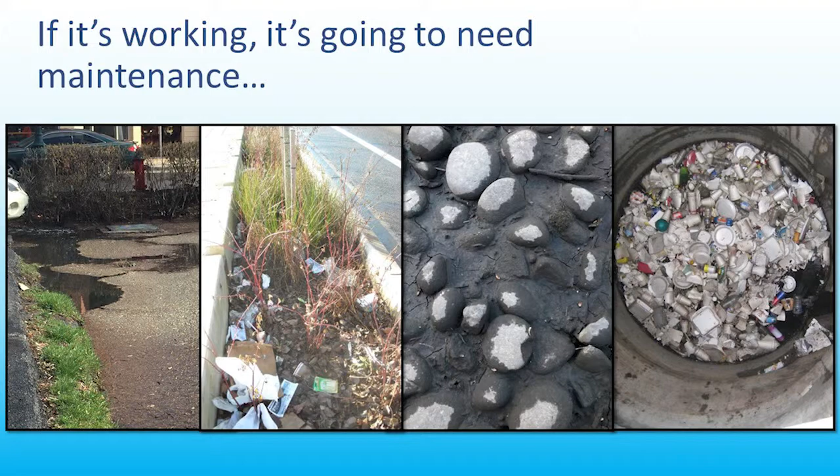These stormwater control measures that we design, approve, and install throughout our landscape - we don't do this as a one-shot deal just to check a box off the permit requirement. We really do expect these things to continue performing as designed throughout the entire life of the project. That means if they're working and removing pollution from the water they're treating, and if they're going to continue performing their flow control functions, they will need periodic maintenance.

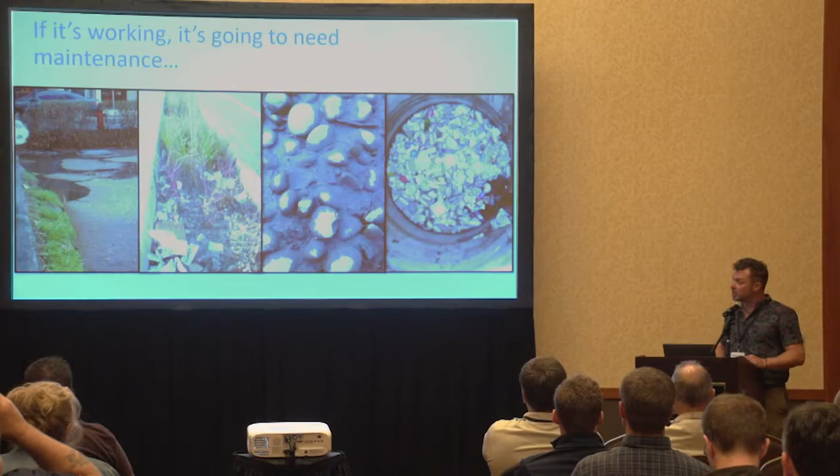Maintenance in this case can be determined up front in the design stage. So when I look at longevity relative to some of the other design variables we commonly use, two that come up often are performance and the hydraulic loading rate. These three play off each other in that standard three-legged stool analogy, where if you mess with a couple of them and try to increase those, you will be sacrificing on that third.

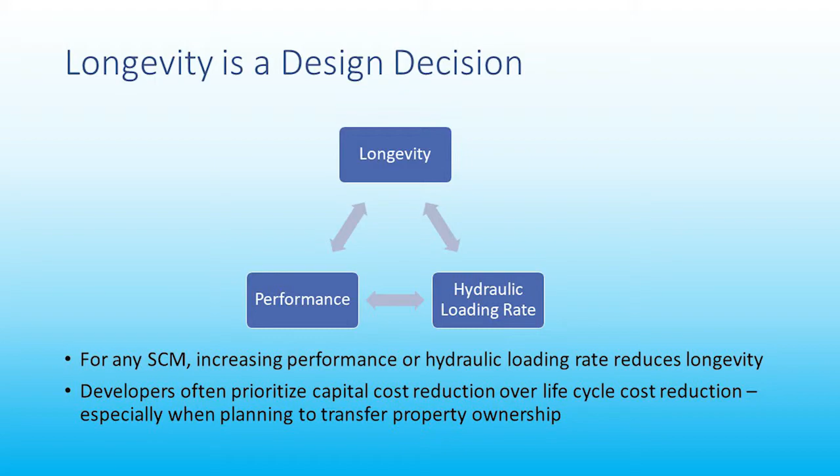Typically, performance is standardized - that's in your permit requirements or your manual requirements. From a developer's perspective, oftentimes the initial capital cost savings of increasing the hydraulic loading rate outweigh the long-term implications of the O&M over the life cycle of the project. That's particularly true when a developer is going to sell that development on. So in this case, we're trying to optimize performance and hydraulic loading rate so the system's as small as possible, and longevity will therefore be impacted.

I think this is generally accepted, but not necessarily delved into all the time. So it's sort of the elephant in the room on the three-legged stool, if you'll forgive the circus analogy.

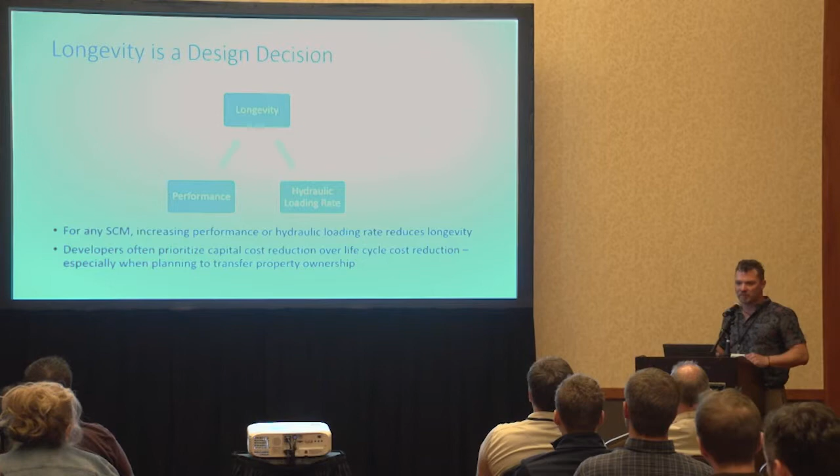So first, I want to look at a couple sample installations. As a designer, we look at these things, and also as a plan reviewer. There's some obvious things that can jump out for us in terms of whether or not these systems can be maintained.

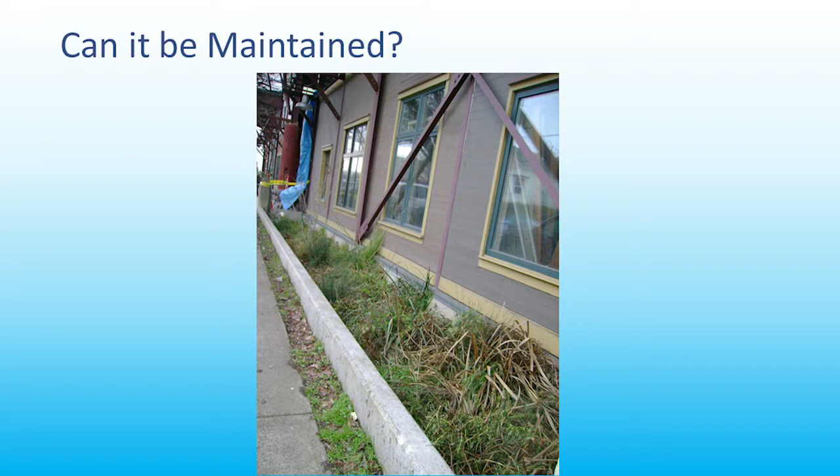Here we've got a pretty standard Portland planter box. This is in Northwest Portland. And is it maintainable? Absolutely. You can get to it from the sidewalk. They haven't done much with the plants here in a little while, but you can certainly inspect it, you can certainly access it. Maintenance, as far as this design is concerned, is quite possible and pretty easy.

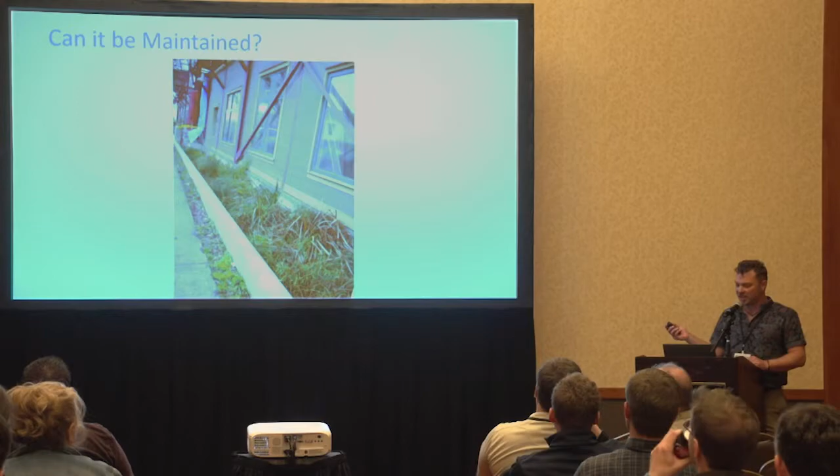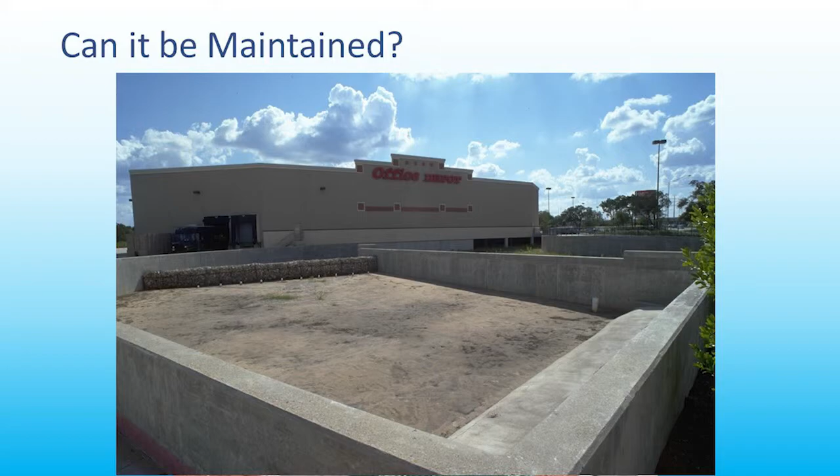Some things are a little more nuanced. This is a sand filter, an Austin sand filter in Texas. It's very large, treats a very large site, and I'd reckon it's designed correctly. But the problem here is the maintenance access. You can maintain it, but there's no vehicle access, there's no way to get irrigation close to it, some of the other common tasks that would be needed to properly maintain this. So someone will have to get in there by hand, and even given labor rates in Texas, this is likely to be a pretty high O&M burden over the life cycle of this stormwater control measure.

We talk about maintainability. There are those aspects that we can control with the design, but a lot of it also comes off the site. It's very site-specific, and this is really what determines how often we have to maintain these things.

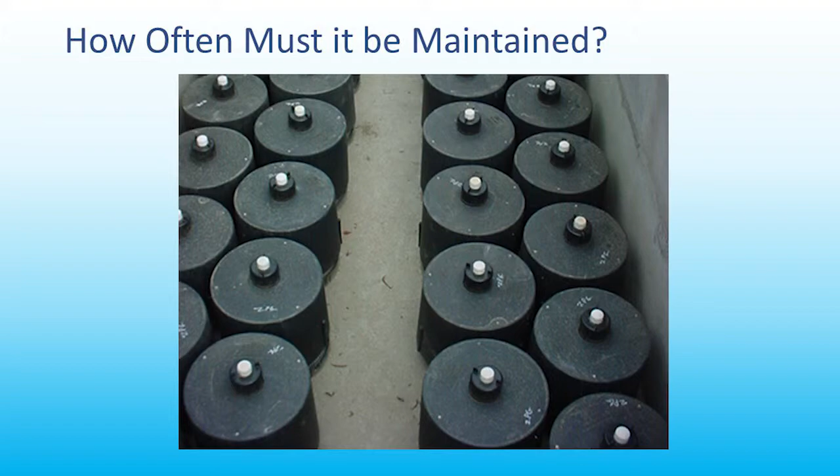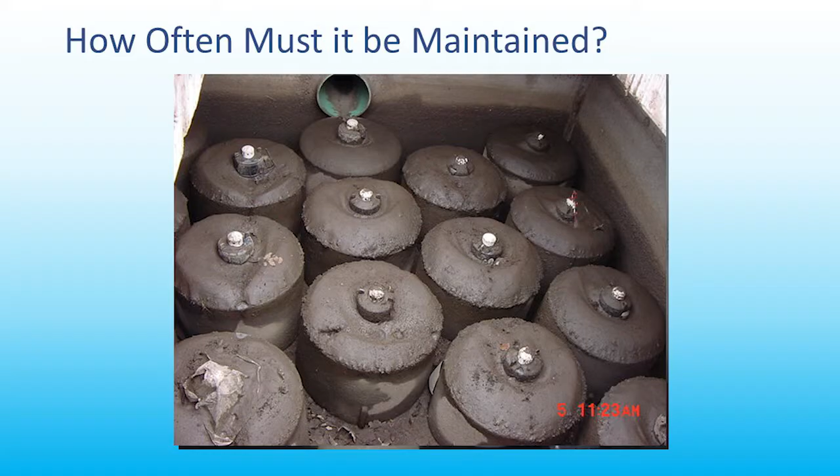So this is a storm filter. It's a cartridge-based media filter housed in an underground vault, and this one's brand new. You could eat off of it if you were so inclined. Over time, though, depending on the site pollutant loading rates and the amount of sediment coming into it, you won't really know by the time it turns into this without an ample and frequent inspection program going on. You're going to hear me say inspection a lot of times throughout this presentation. So for lack of inspection, you could end up going to this, although that's pretty ridiculous.

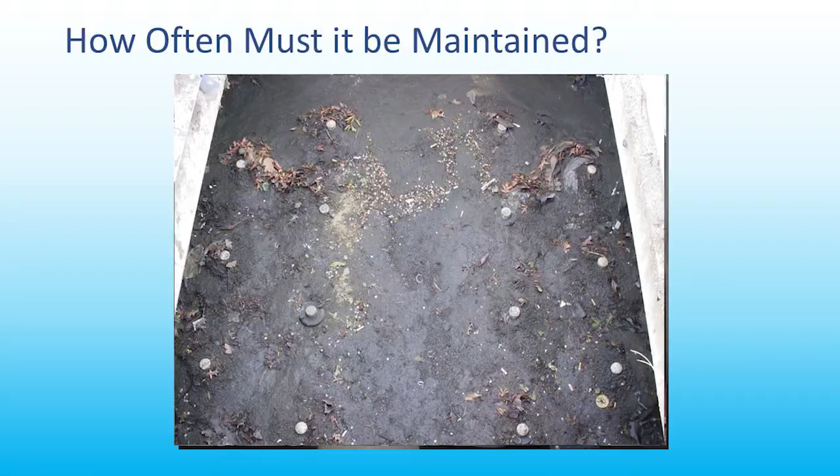To be fair, we do think this was caused by construction sediment that wasn't properly maintained, but it illustrates the point pretty well. Some things, again, are a little more nuanced.

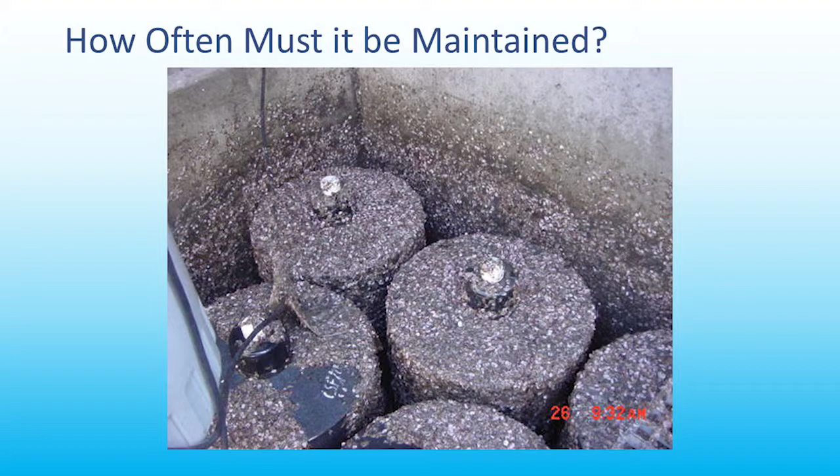Sometimes maintenance frequency should be determined by a different seasonal phenomenon. This is a system that we had in Olympia that we were testing for water quality, and when we opened it in mid to late spring, the entire site is just covered with these beautiful, vibrant pink blossoms from these cherry trees. So when we opened up the vault, everything's bright pink, it was sort of surreal. Do you guys remember those little Hostess snack cakes covered in the snowball things? That's what it looked like. The whole thing was just full of it.

So that's not a lot of sediment, that's not a lot of load, right? We weren't so much worried about the load of this stuff occluding it, but we noticed in the ensuing weeks, what you might expect, there was a lot of export of soluble nutrients from here as the stuff broke down and was carried out. So if downstream I had a nutrient-sensitive receiving body, I'd be pretty careful about maintaining this thing at seasonal events, also in the fall, when the leaves are falling. Just some things to think about that are site-dependent.

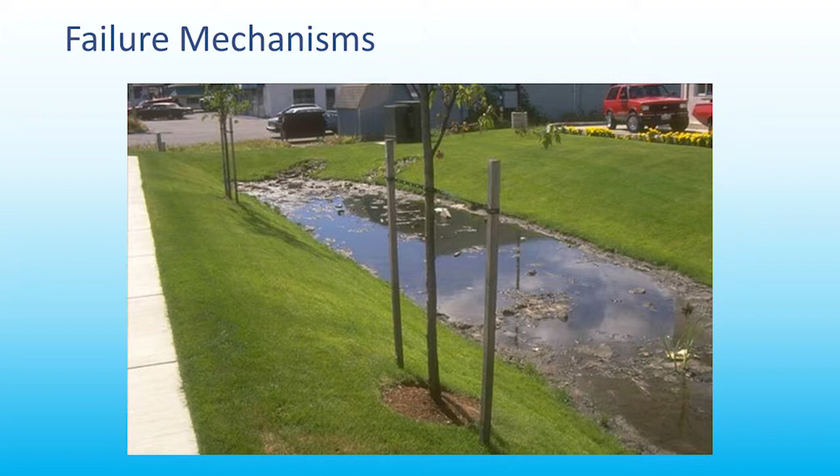Failure mechanisms with these systems can also be pretty obvious, like this one right here. This is a grass swale next to an undisclosed fast food place. Whether or not somebody decided to dump the fryer grease into here one night, I don't know, but it's obviously not working, right? Pretty clear failure mechanism.

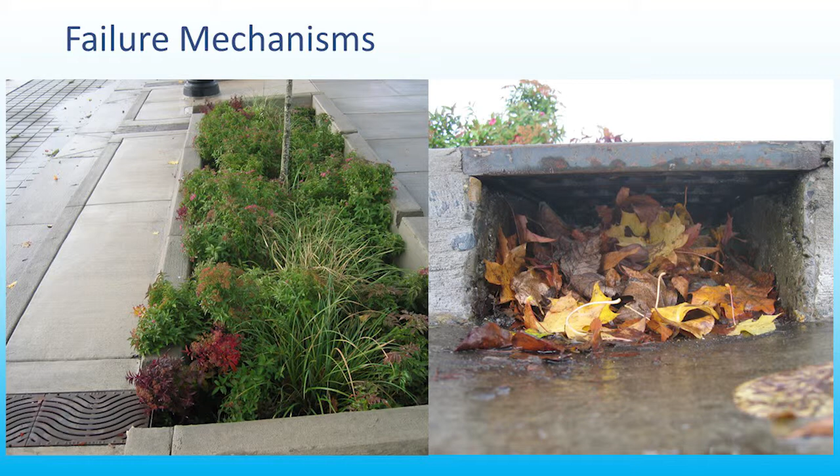But you'll notice that the only inlets and outlets from the street are these little trench inlets, and they're covered. You get down there and check it out, the thing's completely occluded with leaves. So if I'm an inspector just coming by taking a look at this thing, I'd say this thing looks great, but it's not receiving any flow.

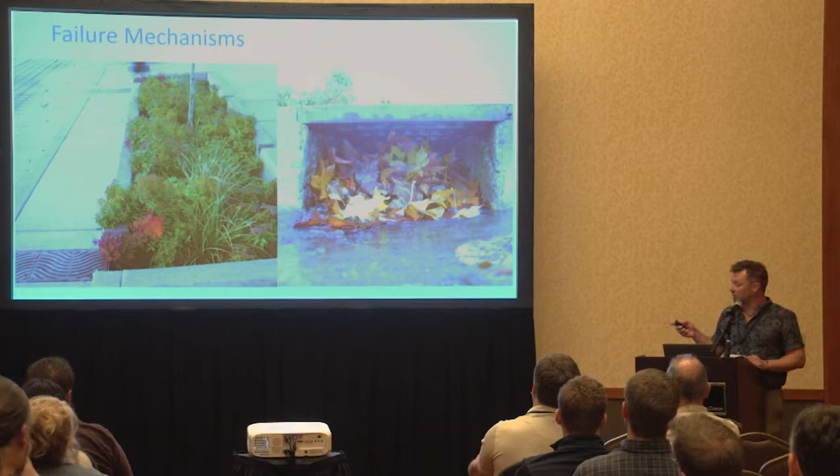No. So stormwater program resources are all very limited. How can we put in programmatic approaches that maximize the resources we do have to ensure that we get the longest longevity out of our systems, and we're continuing to meet our water quality and flow control requirements with the systems that we installed?

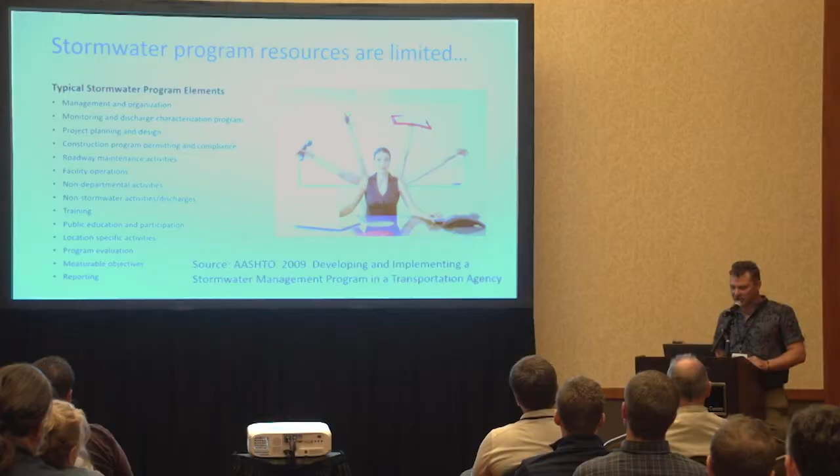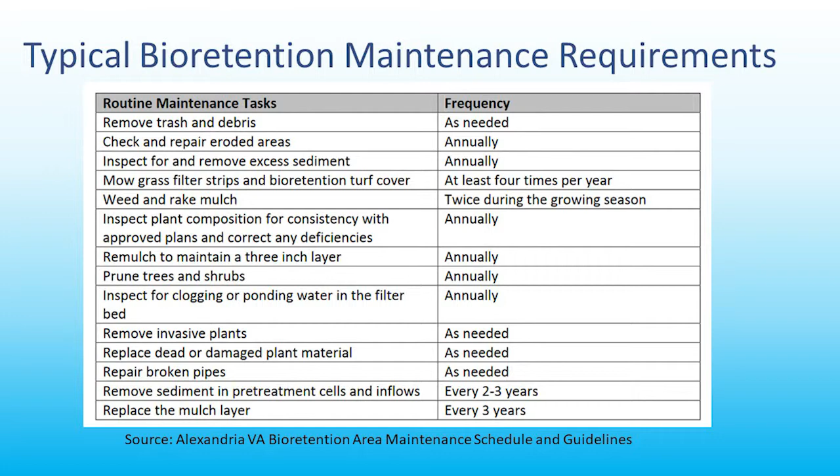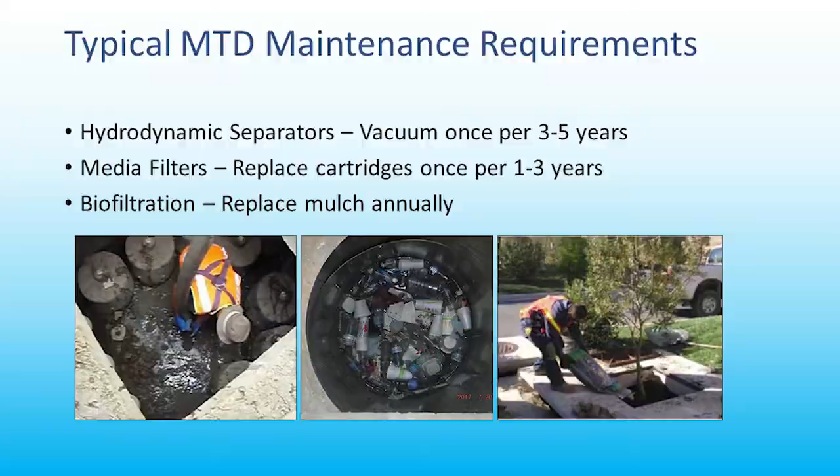Even in manufactured treatment devices that are out there, we have these things developed typically to last a little bit longer, but they do concentrate a lot of pollutants in a small environment. So when we have to maintain these things, there's quite a bit to do. It depends on what the system was designed for. You'll probably need a vactor truck. They're underground, so you'll probably need somebody with confined space certification. Because of the design of these and the site-specific requirements, it's hard to get a feel on this without a lot of inspection.

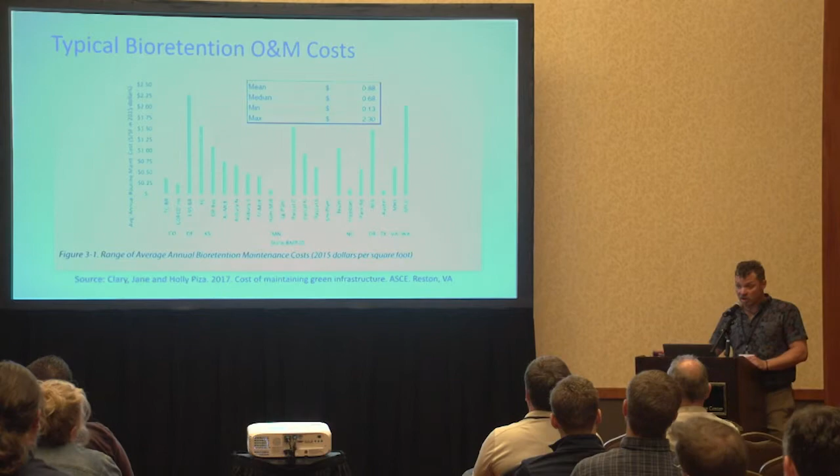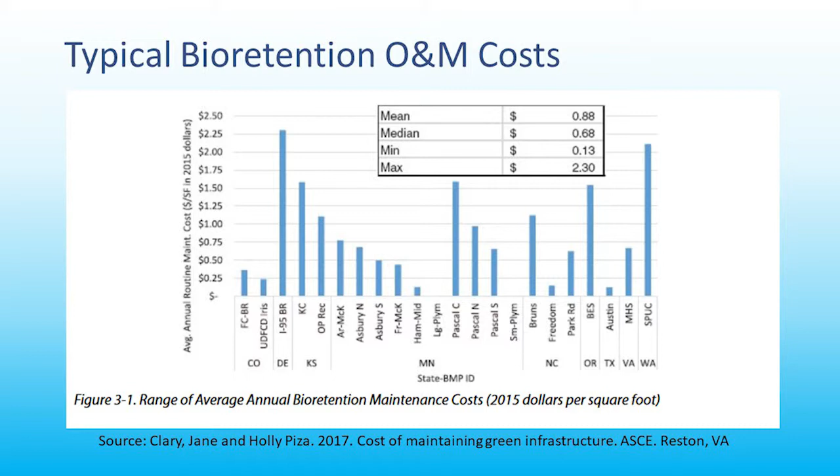Costs are another barrier to implementing all of this. This comes from a great publication by Jane Clary and Holly Piza, rolled out at the 2017 EWRI O&M conference in Denver. You'll notice this cost information is all over the place—these data are highly varied, but they come from a nice, diverse group of sources. If we play with the averages and assume a bit higher than the median, say $1 per square foot per annum for bioretention maintenance, and consider typical designs like 4 to 5% of impervious acre on a given site—that's 2,000 square feet per acre at $1 per square foot—that's $2,000 per acre per year.

Costs are also available for manufactured treatment systems. These are meant to last a little longer than non-proprietary systems, but you do have this concentration of sediment and pollution, which requires disposal costs and a lot of concentrated effort and machinery. So we see typical costs at about $1,500 per event.

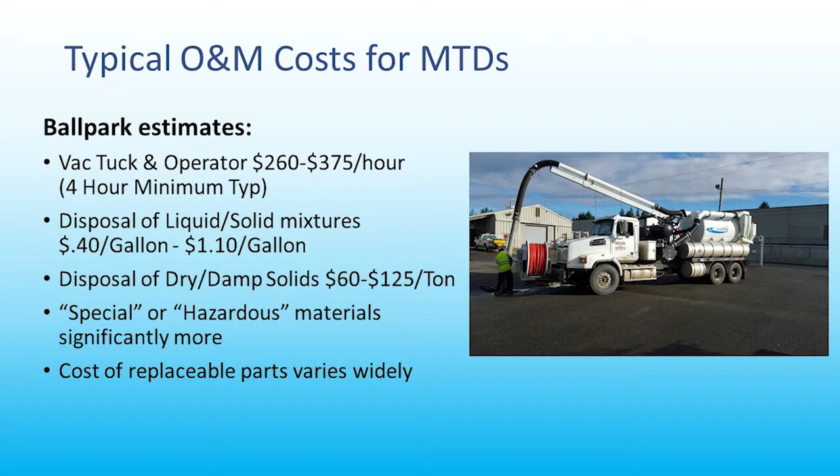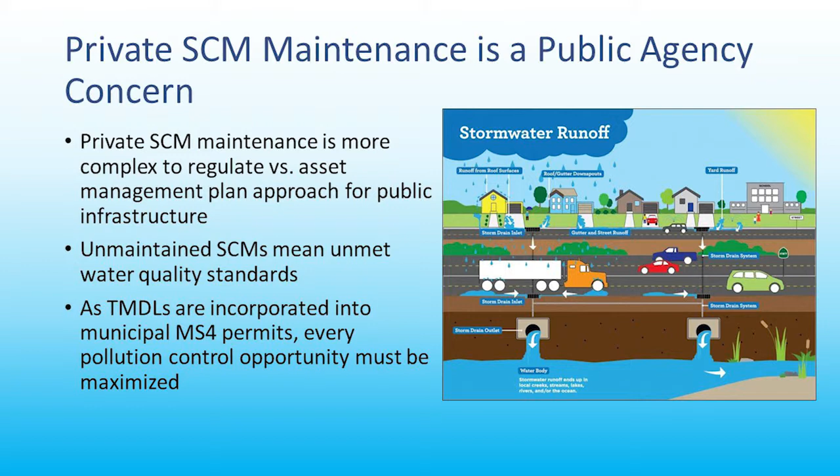So somewhat comparable. And let's not even get into private sites—that's a whole host of other problems for the public sector. Can you access the site? Do you have enforceable regulations and ordinances that will allow you to force compliance with maintenance requirements? What happens if a property changes hands from one owner to another? How are we keeping track of that?

So an integrated regulatory framework is definitely key to managing and keeping all of this together. This starts at the top with the permit language and goes down to the municipality within specific ordinances that empower those local programs to enforce the requirements set in the permit. These things need to be dovetailed together and integrated. I'm going to go through a lot of examples of language for that—it'll be pretty quick, but please remember the references are all provided.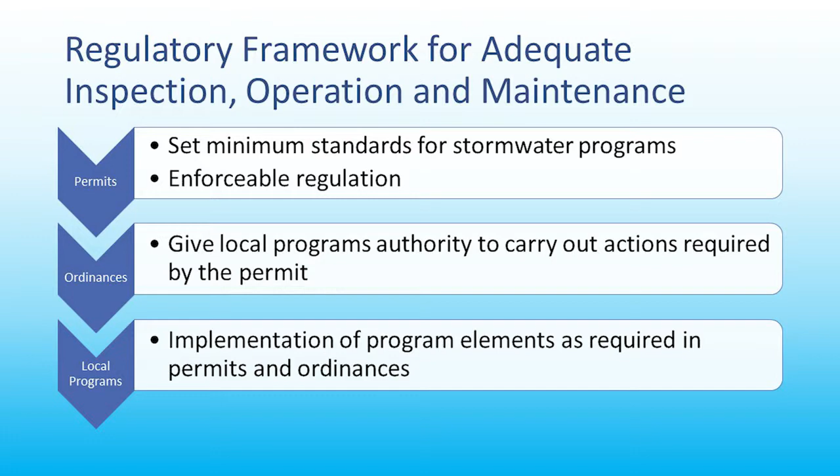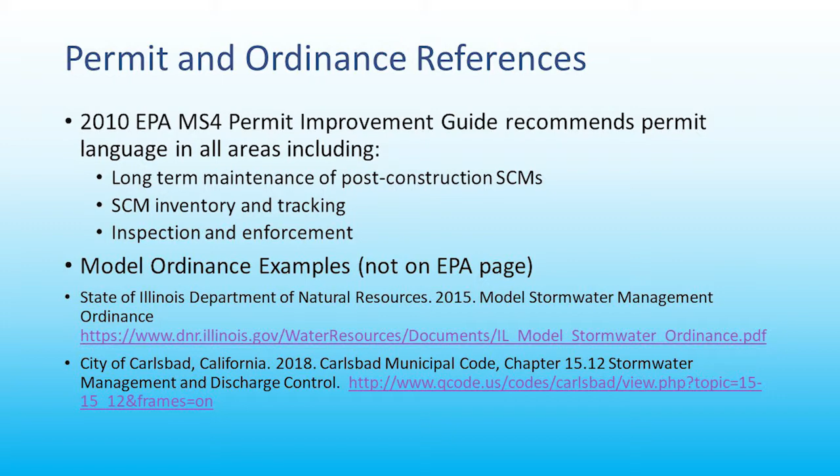For permit language, a really good source, even though it's approaching nine years old, is this 2010 EPA document where they released an MS4 permit improvement guide. There's a lot of language in there that specifically addresses long-term maintenance requirements, inventory and tracking so you know where these systems are, and inspection and enforcement. I'll give you the link to that in just a second.

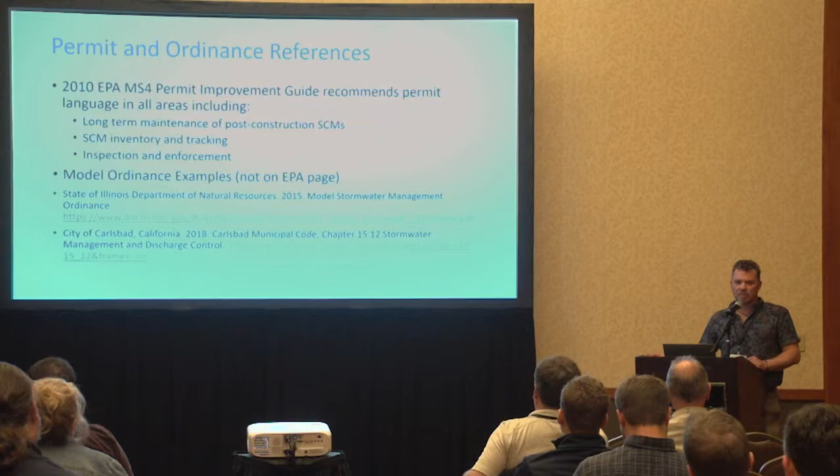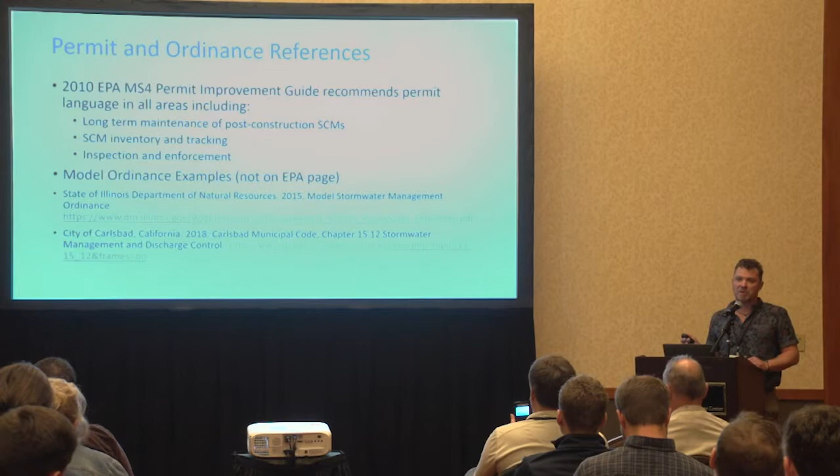Model ordinances are also available—there's a lot of references out there so you're not reinventing the wheel. I've got a couple examples here. One is from the state of Illinois, giving specific ordinance detail about right-of-way passage into facilities, and being able to construct operator and permittee maintenance agreements, and stuff like that. The city of Carlsbad also has a very well-documented enforcement mechanism that we'll touch on in a couple minutes.

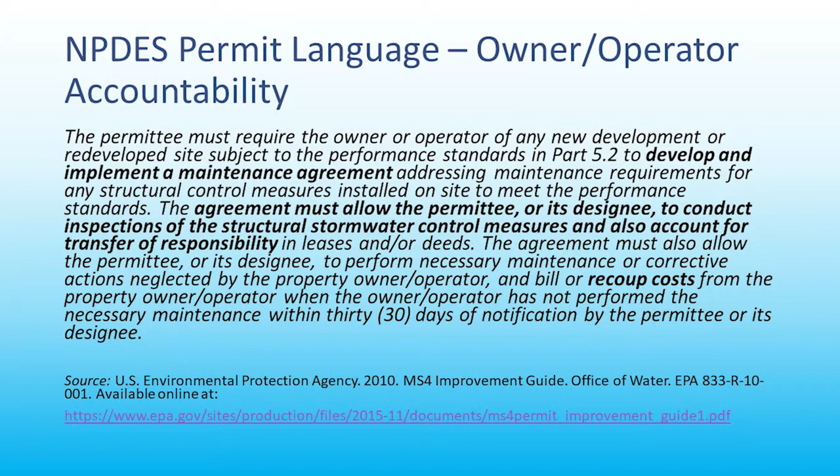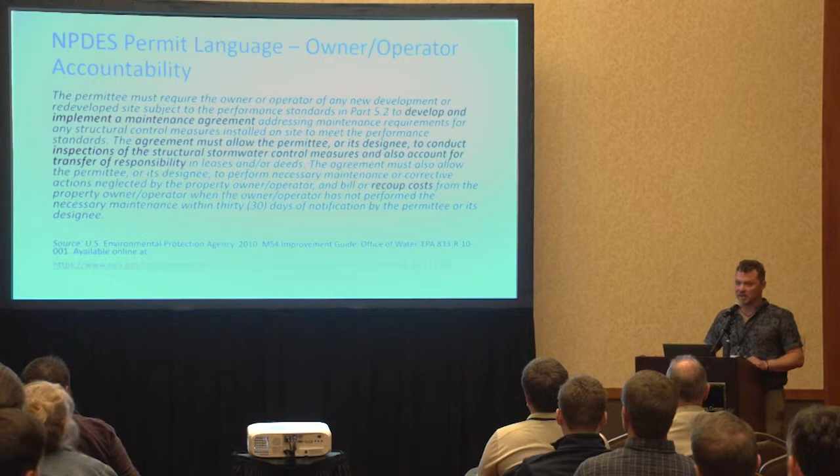Back to the EPA language—don't bother trying to read all of it, but the bold words really do address some of the major elements. The EPA has written this for you: you're going to develop and implement a maintenance agreement that allows the permittee or his designee to conduct inspections on the site, to go in and actually conduct maintenance for the owner-operator, and recoup their costs if necessary. These are important program elements that are out there.

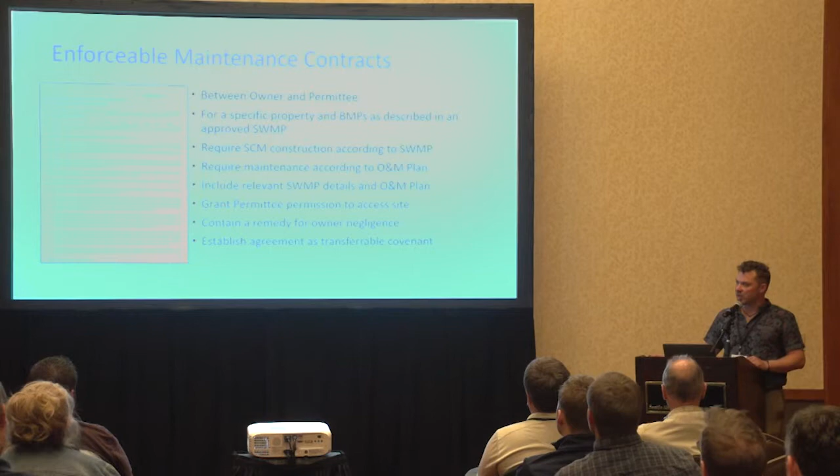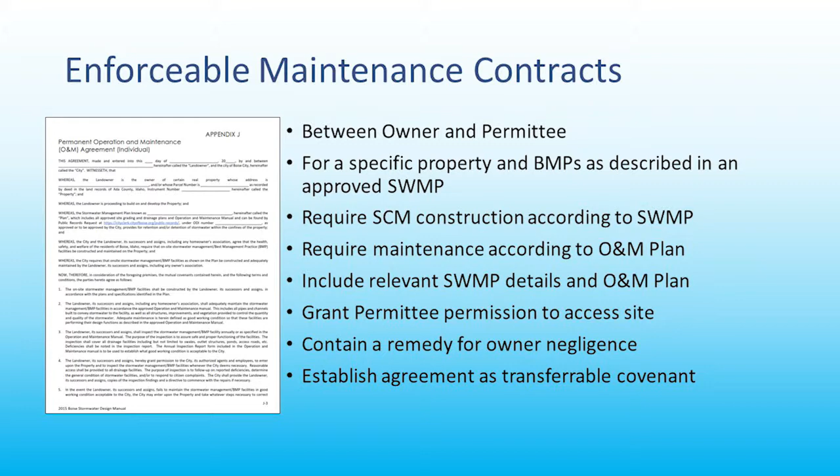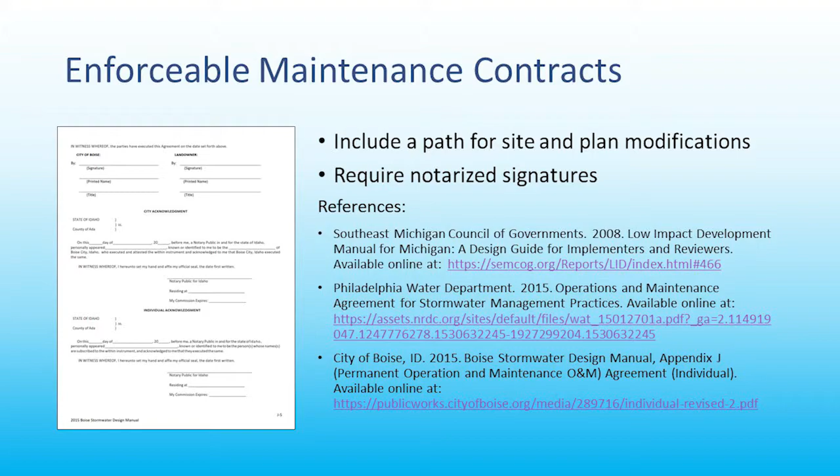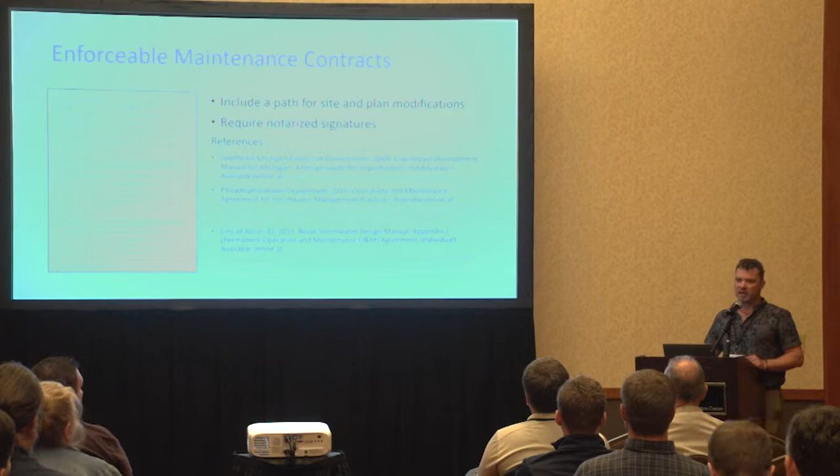An example of one of these maintenance contracts is pulled from the appendix of the Boise, City of Boise Stormwater Manual. It specifically lays out who's the owner, who's the permittee, the location of the stormwater control measure, its maintenance requirements, and all the relevant information, plus granting the permittee access. All this is done up front before final approval is granted for these projects. If I were a maintenance operator, I'd go to developers with potential sites and say, I'll give you a maintenance contract—you can put that in with your report and reference us in your maintenance contract, easing that through. Having this identified up front with contractual obligations is a very good, enforceable way for a local municipal permittee to take huge steps ensuring private sites are maintained.

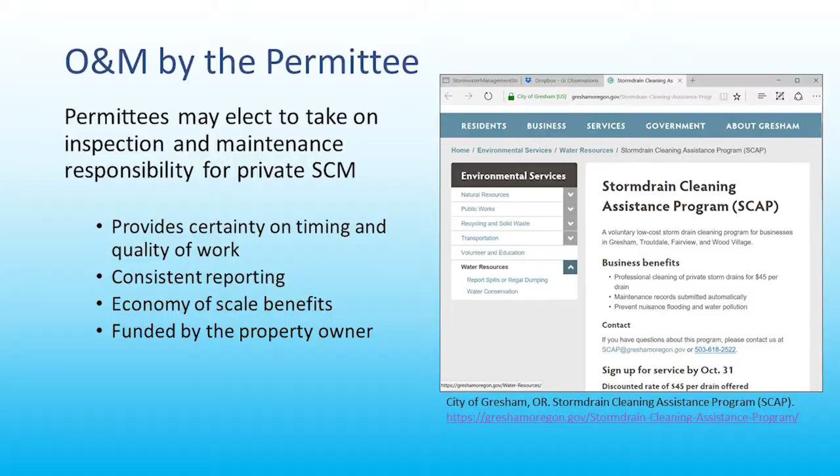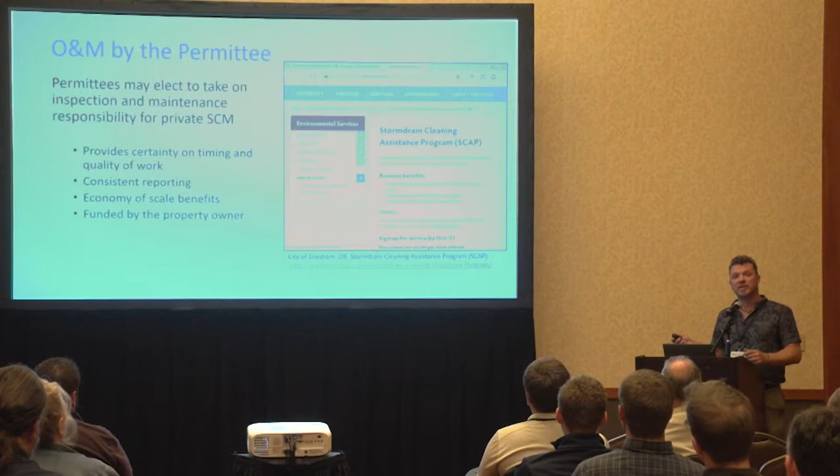Or you could just take it out of their hands completely. This is the City of Gresham's website for their storm drain cleaning assistance program—for a flat fee of $45 per storm drain, they'll come and clean it out for you. Additionally, they require that most underground systems be placed in the public right-of-way so there's no conflict or access restriction. It's pretty forward-thinking: it's paid for by site owners and developers, allowing them to maximize their scale of economy and ensure consistency across their program.

Fundamental to all of this is being able to track and locate where these systems are. So having an inventory and a database where these things are itemized and identified is critical.

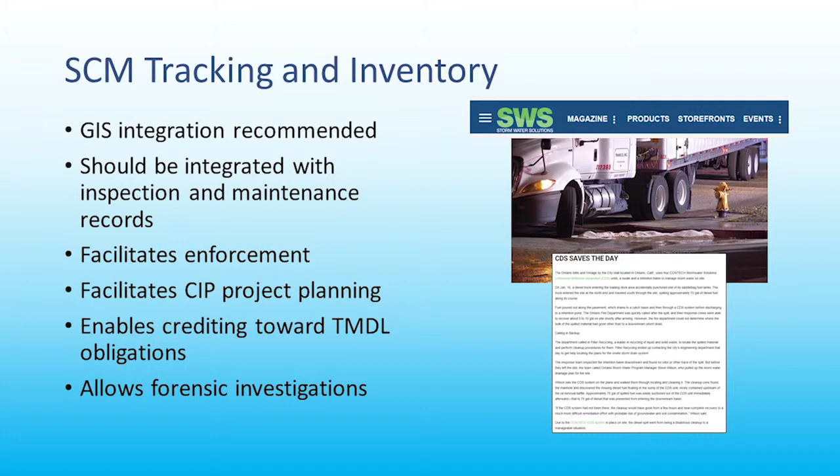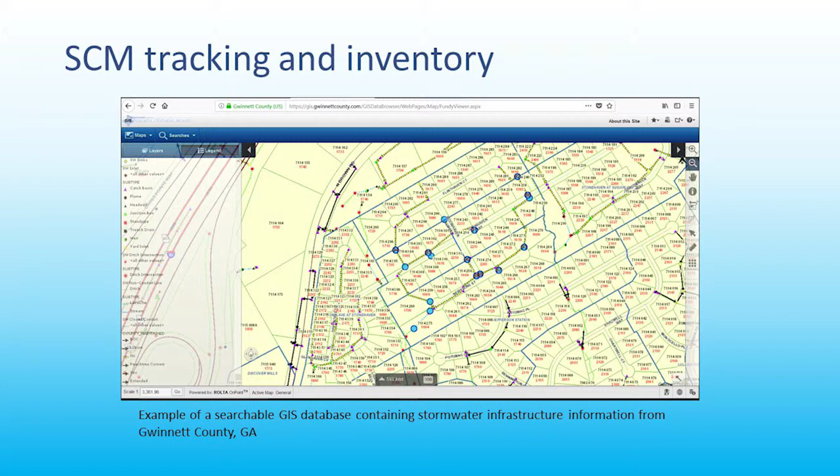If you can tie that in with your GIS systems, it makes it even more useful, especially for future requirements like capital improvements planning, and it makes it very accessible because people understand maps, so you've got it all in one place. And with GIS, you have the ability to put in all sorts of other attributes.

This is something that the LA Regional Water Quality Control Board has capitalized on. They identify specifically what needs to be in their stormwater control system database, so you know what the system is, what its type is, the date it was approved, and the last time it was maintained. LA requires maintenance records that go back for 3 years, so you've got a pretty good history on this. Just some smart approaches from what other people have done.

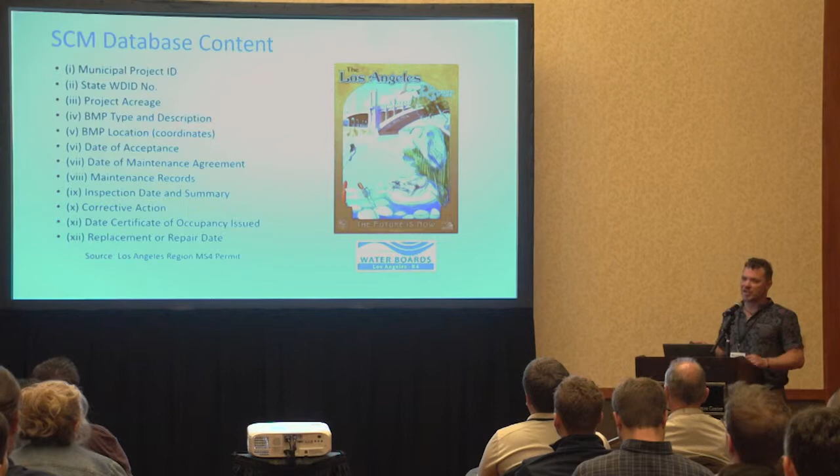We talk about inspections. The fundamental, most important inspection is probably as-built verification. Now, I love this photo. This is not in the US, but I'm sure this has happened here somewhere as well. It's a clear case of designer meet contractor.

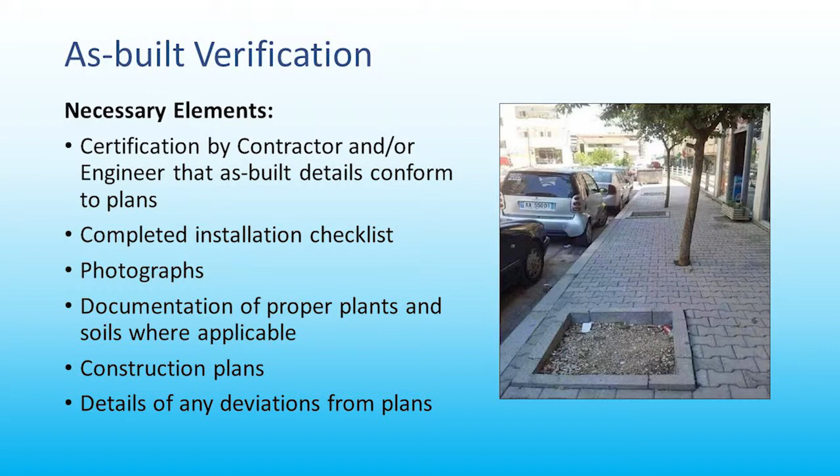So even if you do have your as-builts out and the system was installed where it's supposed to be, there's a lot of other design variables and attributes that can't be checked or proven just with a visual observation. Can we ensure that, for instance, a bioretention system wasn't compacted by equipment during installation?

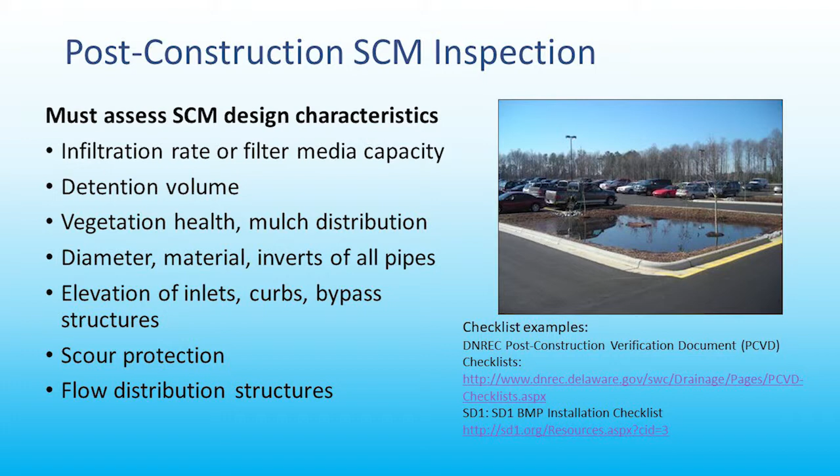Here's just a couple of examples. This is from some language from Delaware's Department of Natural Resources and Environmental Control. They've got a post-construction verification document where they require infiltration testing after installation, and they require documentation of vegetation health and ensuring that elevations are correct - pretty specific stuff. You might have to get a survey crew and somebody to do an infiltration test, but they could potentially hold back your occupancy certification if you don't have this done.

Besides the as-built, and immediately afterwards, routine ongoing inspection is very important, and I would say it's even more critical within the first couple years of an installation. This gets back to those site-specific variables that really control system longevity in conjunction with its design.

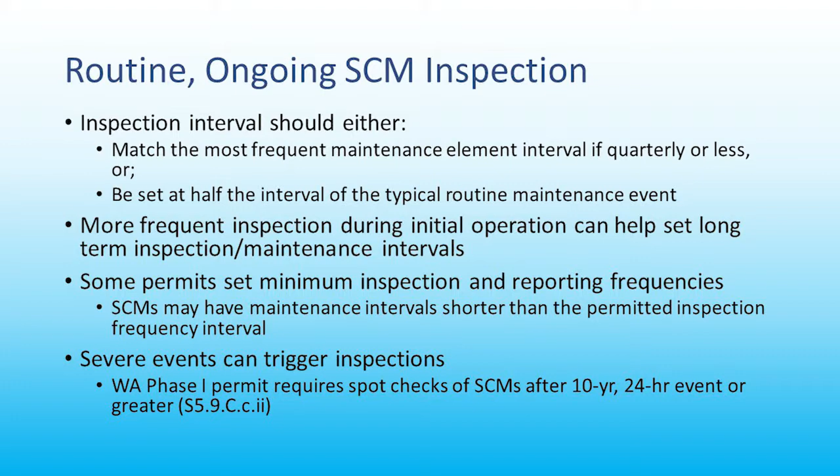A lot of agencies will go off of predictive inspection intervals, and I would argue that for any given system out there, there's probably a lot of documentation saying about how long it'll work. But within a given site, there's a lot of variability. So that inspection, especially in the first couple of years, should be at least half of what that predicted maintenance interval is going to be, just to ensure that everything's looking right relative to that specific site.

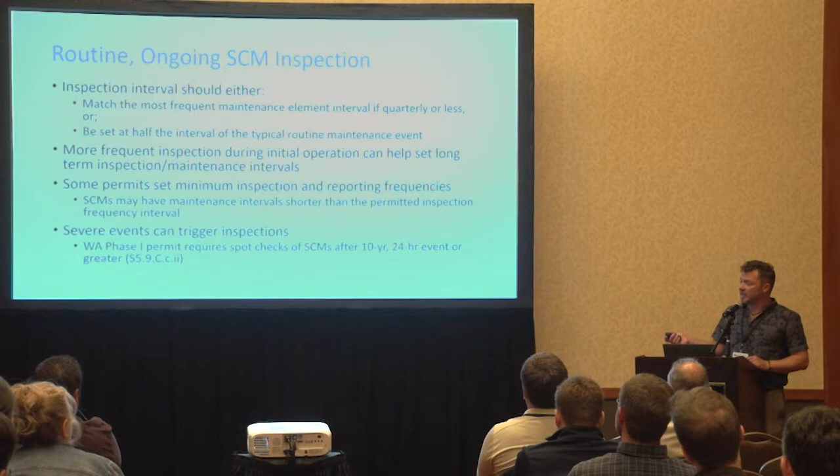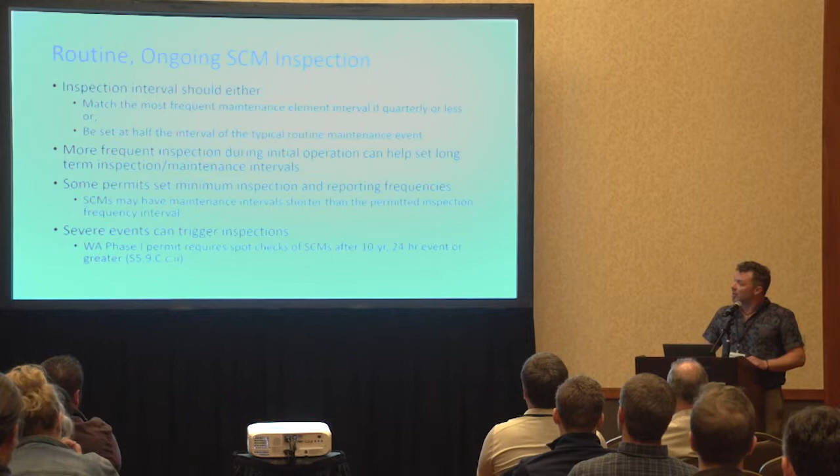Another smart thing that we've got here in Washington is spot inspections in the Phase 1 permit after large events. That makes sense - you just had your 10-year, 24-hour rain event, which seems to happen every week. But when this happens, go out and take a spot check at some of these systems, ensure that there's not damage.

And finally, we get to the progressive enforcement element, and this is really what comes out of this City of Carlsbad ordinance that I referenced earlier. This is very well thought through. They do require that the site owner contribute annual inspection and maintenance reports.

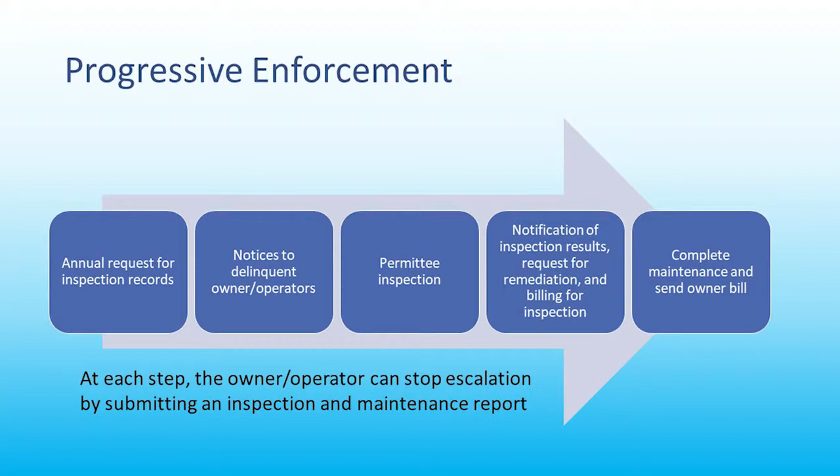If you don't do that, they'll remind you. If you still don't do it, they'll come do it for you, and then they'll send you the results and a bill. And if you still don't follow up then, they'll come on your site - they have the right to do so - they will conduct the maintenance and charge you for it. It's nice to know that at any point along here, the owner-operator can keep the next escalation from happening by complying. But there is an enforceable outcome that brings these systems back into maintenance.

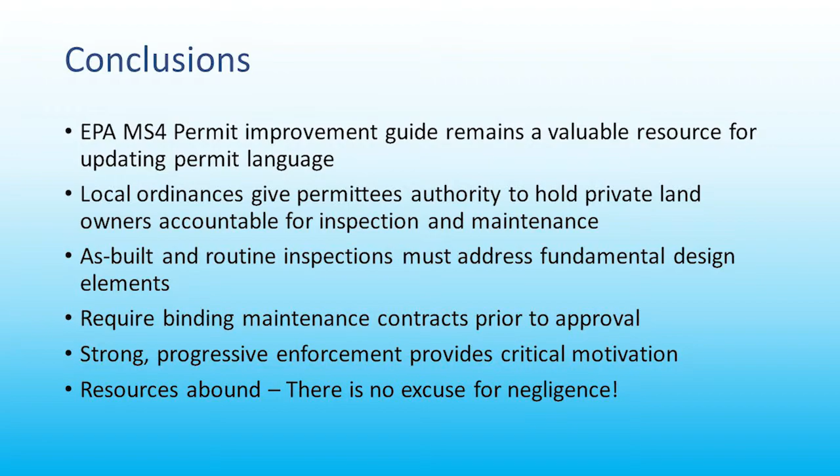So building these city ordinances that are in line with permit language and really offer you this integrated framework is critical. So I offer you to go back and review some of these references that were here. There are so many references available out there, so it shouldn't be too hard to cobble together a good program. But those routine inspections and those as-builts are probably the major thing that'll go the distance for you in terms of having positive outcomes for longevity.

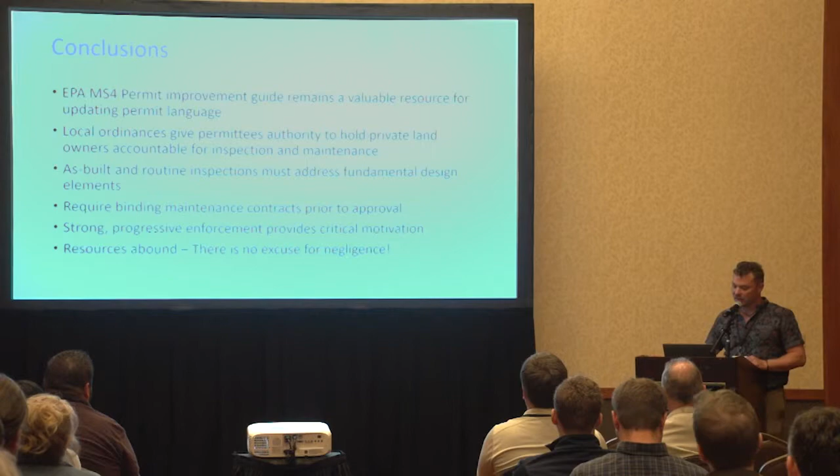So that was pretty quick, but I think I saved some time for questions. Yes?